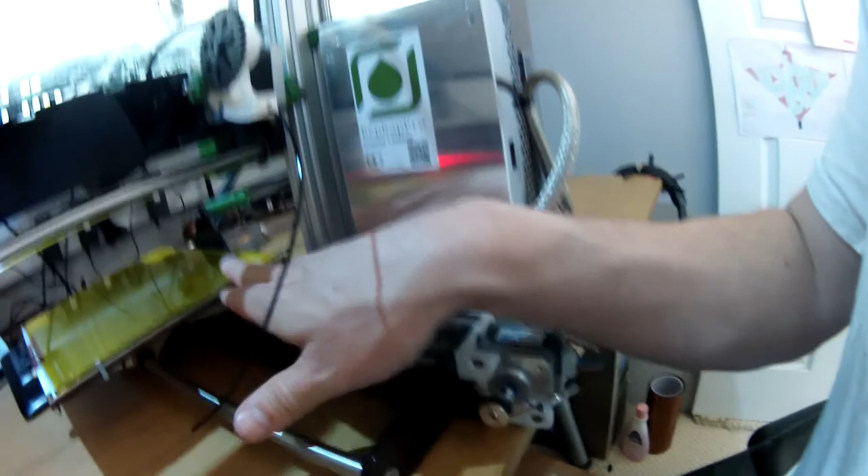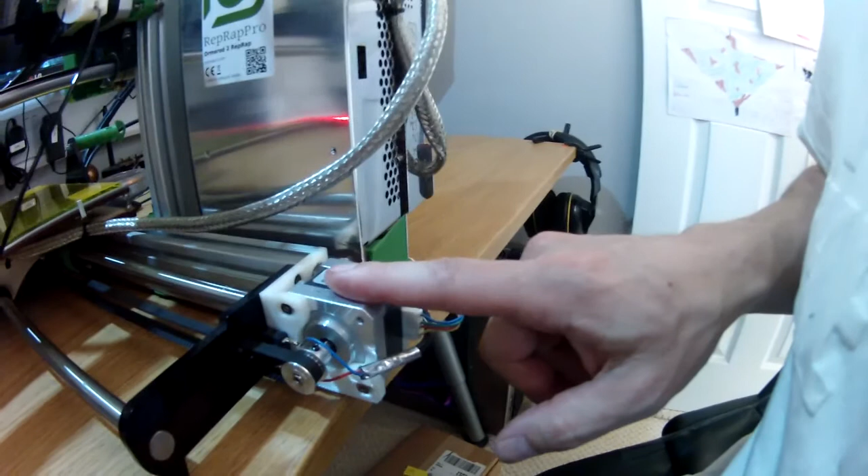So you can see here, if I push the bed over here, we've got some linear guide rails here just to kind of help control the movement. And then we've got a rubber drive belt coupled to a stepper motor here, and that controls the sliding of the bed in this axis, which is actually the y-axis.

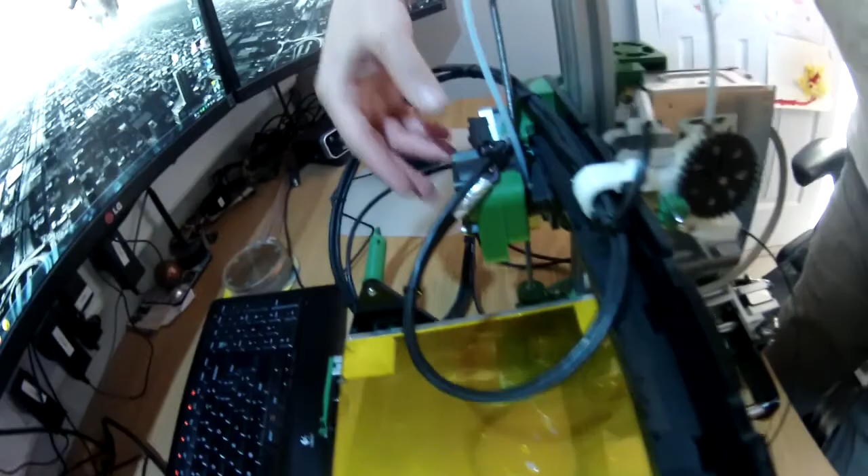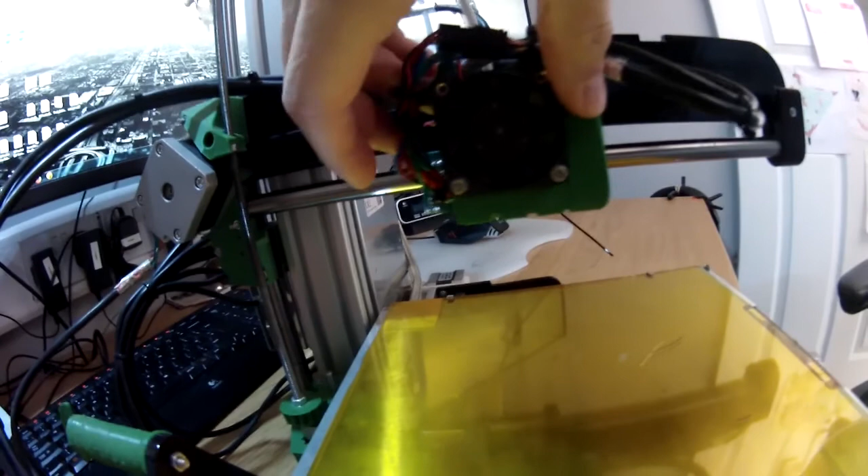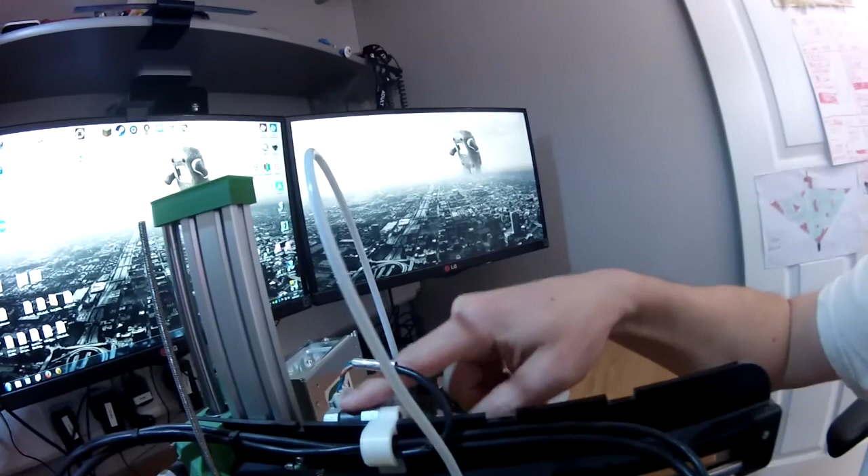Likewise then, if we come up to the top here, the print head, I'll move this printer around so we can see it a bit better. So here's the print head, and this is on the x-axis, so you can see there's another drive belt here, another motor here, controlling the axis moving in that direction. This stepper motor here, by the way, is operating the extruder. We'll come on to that in a second.

And down at the bottom here, there's another motor you can see tucked away here. That's twisting this threaded rod, which, if you just look carefully, you can see is adjusting the height of the head. So that's how we get our 3 axes of movement.

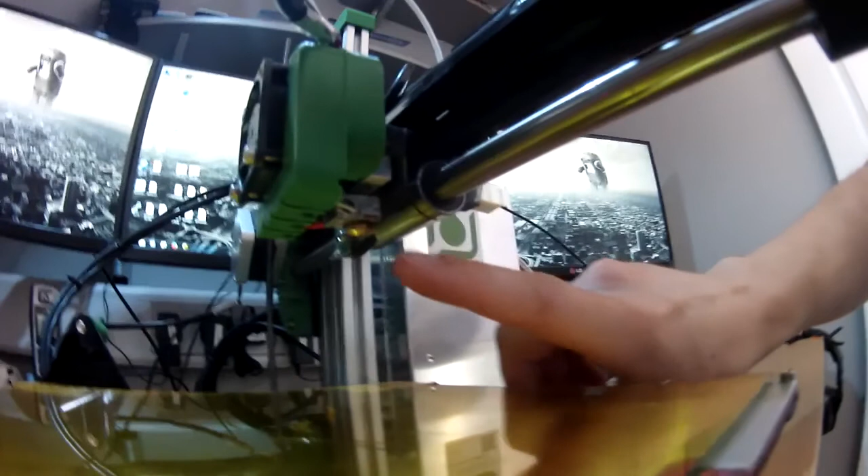We'll come on then to the print head itself. So the main components here, you'll see right at the tip here, there's a stainless kind of tip, and there's a very tiny hole in there, which is obviously where your material is extruded out of. This block of aluminium has got a heater in it. Gets very hot. So this is what's affectionately known as your hot end.

There's a temperature sensor in there to control the temperature, so it monitors itself, understands what temperature it's at, heats as it's needed. The fan is really there to obviously regulate the temperature of that print head, but it also blows air out across the model and cools that plastic as it comes out, so it kind of cools the material.

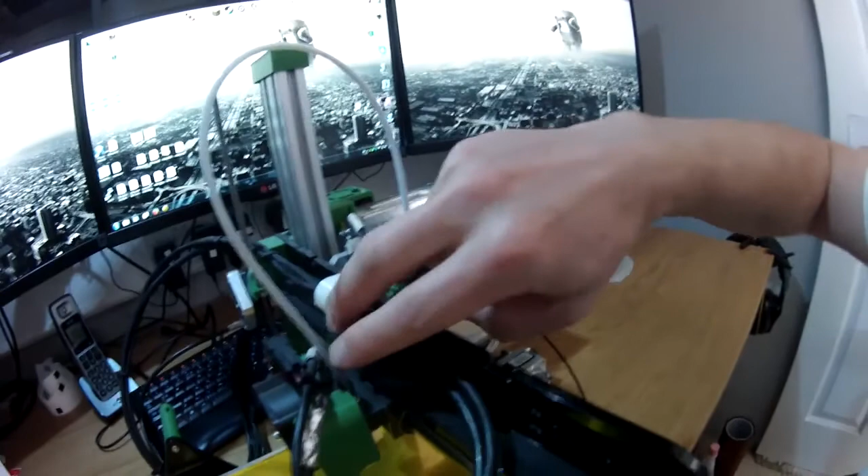You can see here there's a thing called a Bowden tube, which is basically the guide tube for your filament. So I've cut some filament off here, but you can see it kind of goes into the machine here. This motor drives a hobbed insert, so like a little insert with ridges in it, that grabs that plastic and pushes it down the Bowden tube and into the hot end.

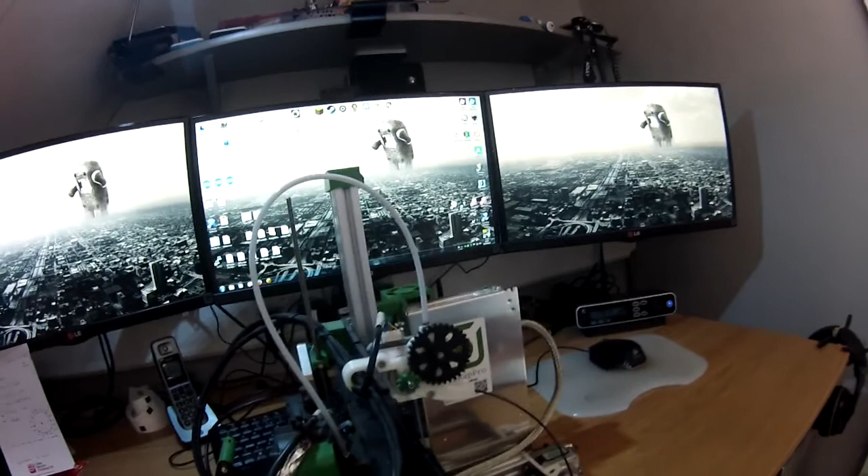And it's that pushing it into the hot end, coupled with the 200 degrees centigrade, which melts the plastic and forces it out of the tip here to create the model. And it's all very specific about the speed that this pushes through, the diameter of the material, the diameter of the head, to get an accurate print. Otherwise there's not really a lot more to this.

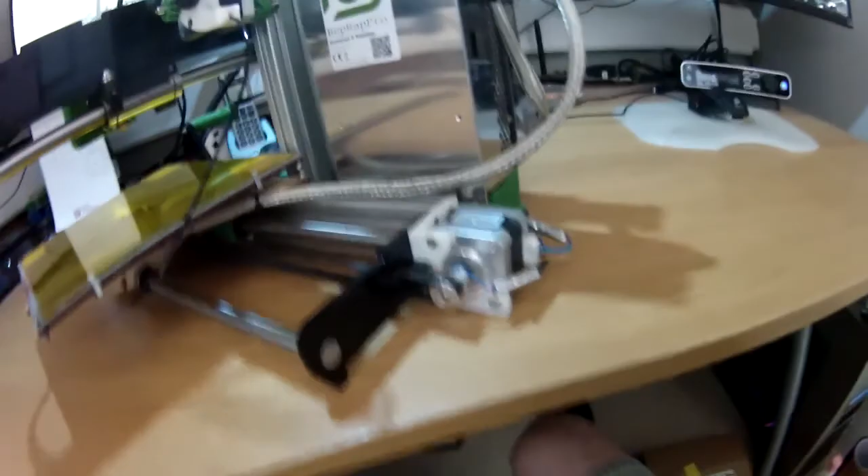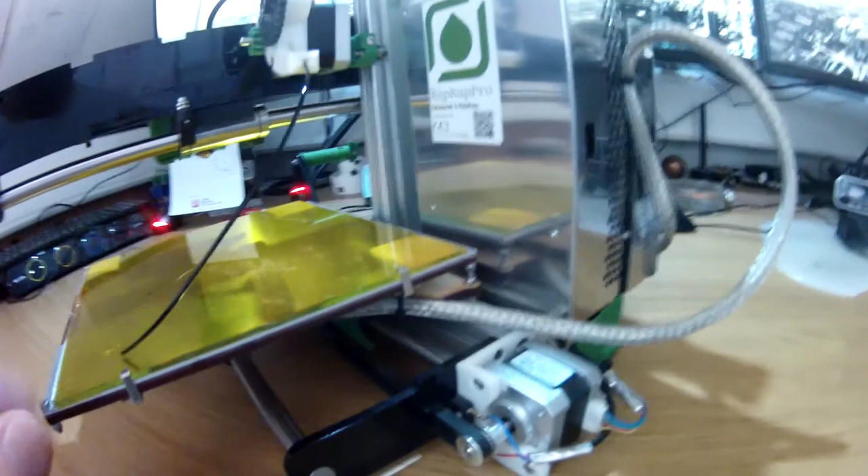There's one limit switch just down here you can see. If I move this, you might just be able to hear the click. So you can just about hear that click, I think. And that just allows the machine to understand when this y-axis has reached its limit. And it uses that to do a thing called homing, which we'll come on to later.

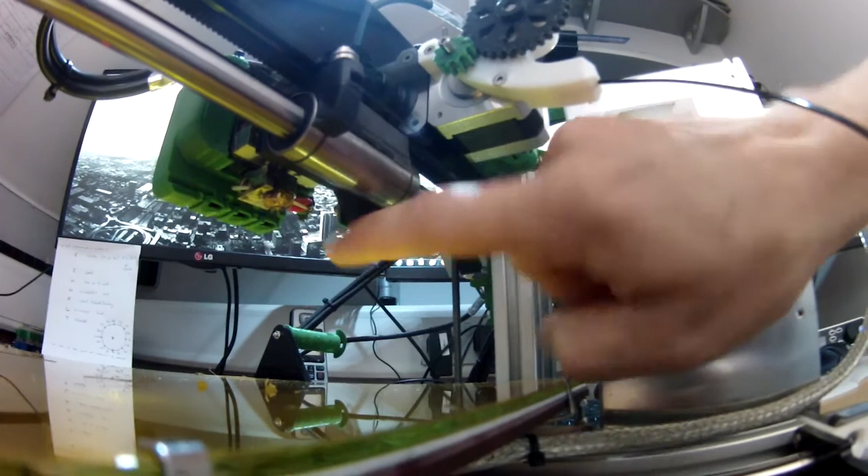There's also, under here, another sensor on the carrier for the print head. This is a distance sensor, so it's detecting the distance down here. And it uses that to home the z-axis. And it also uses it to home the x-axis as well. What it does is it kind of scans across the edge here, and when it drops off the edge of the print bed, it knows it's at that edge.

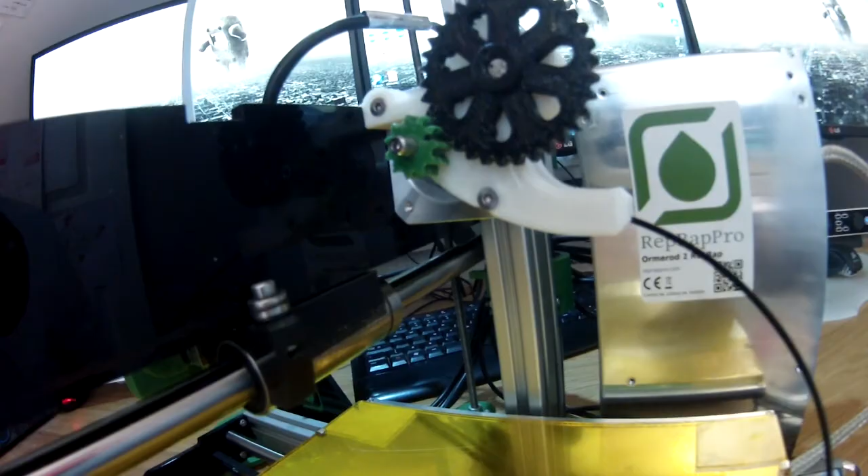Finally then, obviously we've got the electronic part. So this is just a power supply, this kind of metal enclosure here.

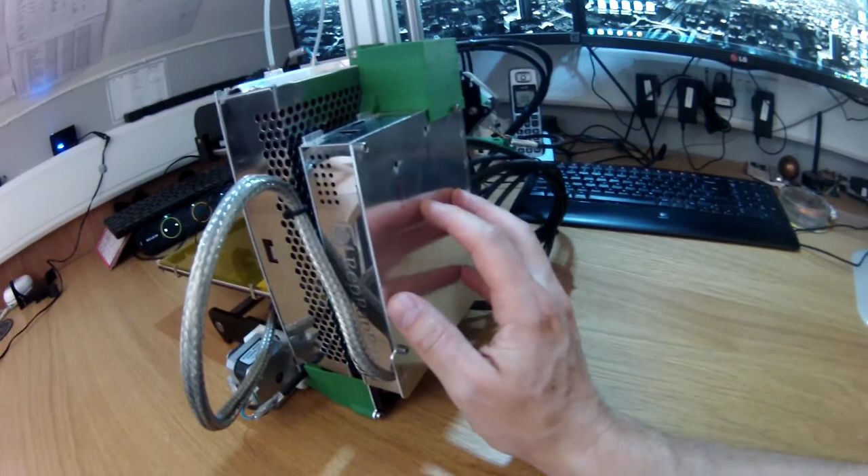So that's just a regulated power supply. And then we've got all the electronics in this little part here. It's basically an Arduino style board. But it's got some interfaces here, so you've got a USB port if you want to wire this into your computer directly. There is a network port, which I prefer to use.

So the Ormerod 2 introduced a network interface. So you can connect to this via a web browser and you can kick off all of your jobs that way. You also see there's a micro SD card here. That just stores configuration settings and all of your 3D instructions, so your print files basically. We'll come on to that. A cooling fan there, and that's about it really. There's not a lot to it other than that.

You'll notice something I should just point out. This has just got a single print head on it, but you can get machines with 2 or even 3 hot ends on them, so 3 complete extruders, so that you can load them up with multiple materials, different colours for example, and then you can print without having to change and reload material. Nice if you want to do multicolour printing. They basically just duplicate how many print heads they have on them.

The other thing that you can get is enclosed 3D printers. This one, as you can see, is out in the open. This would be very beneficial if you plan on printing in ABS. So maybe now is a good time to touch on the two main materials that these 3D printers work with.

So the most common one is a material called PLA, polylactic acid. It's what this is. It's what I do 99% of my printing in. It's cheap, cost effective. It melts at a lower temperature, so it's easier to print with, easier to get consistent results with, and it doesn't need heating up quite so much. It's not as strong though, so it depends what you're printing for. For most people, PLA is fine.

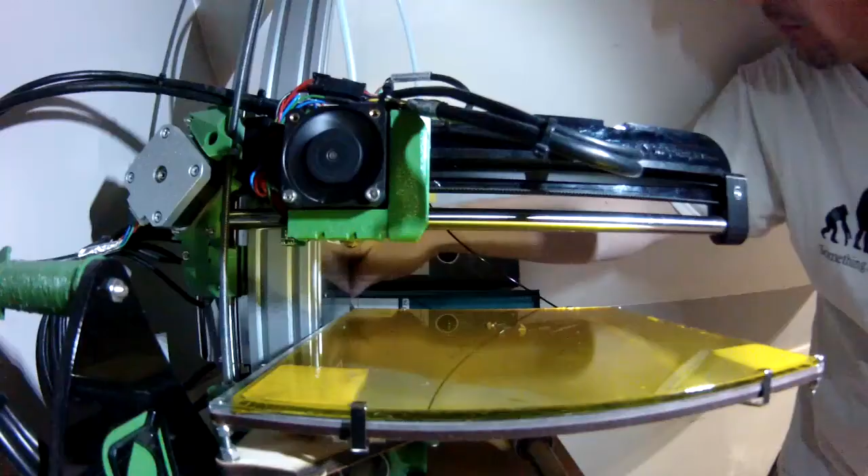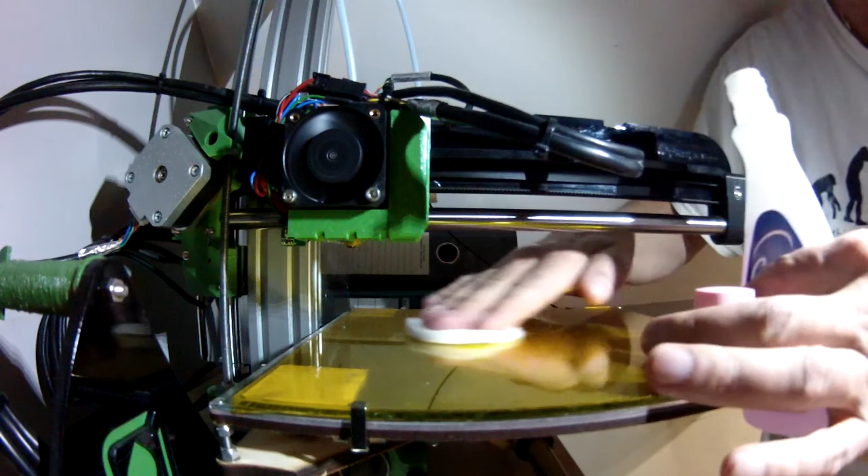First job on the printer here will be to clean the print bed. Make sure it's all nice and clean, not covered in any dust if it's not been used for a while, but also any grease or previous deposits of plastic. So best thing I found is a nice cheap and cheerful nail varnish remover. The key active ingredient in this is acetone. So just a bit of cotton wool, give the bed a good clean.

I'm using this one. I think I just got it from Boots, a popular high street chemist here in the UK. It's Q-Tex nail varnish remover. There you go. Smells quite nice, inoffensive.

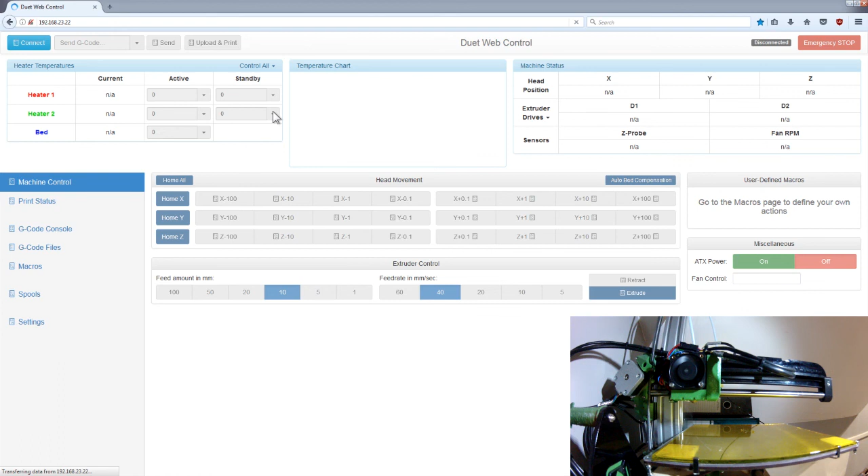Over to our web browser then, we're going to use this to connect to the web interface on the Ormerod 2. You can see it's all nicely presented in your browser, various controls here, but the key ones we're interested in are up here in the left. You can see heater and bed. And we're going to get the bed warming up.

We're going to just get the heater started on that, because it takes a good 10 minutes. So we'll get that going to 65 degrees. We'll get the head warming up as well. That warms up quicker, but the main one is to get the bed going. Yeah, that'll take about 10 minutes. So while that's going, we'll make a start with showing you how I use Simplify 3D, the software to do the creation of the G-code from the 3D model.

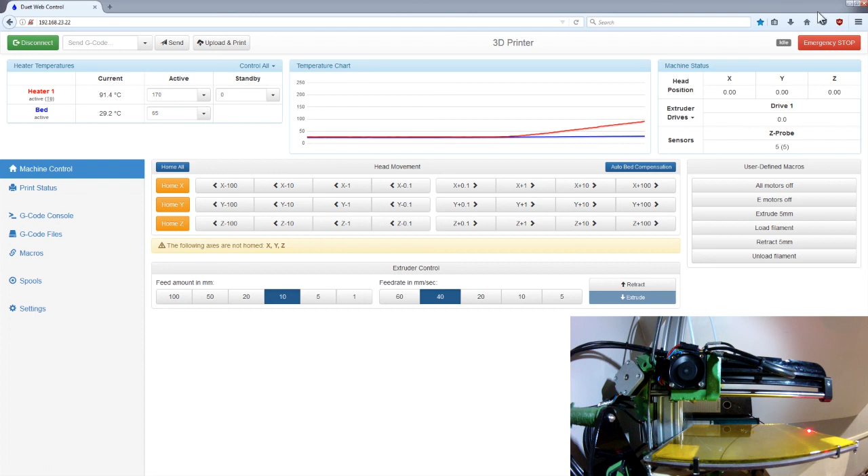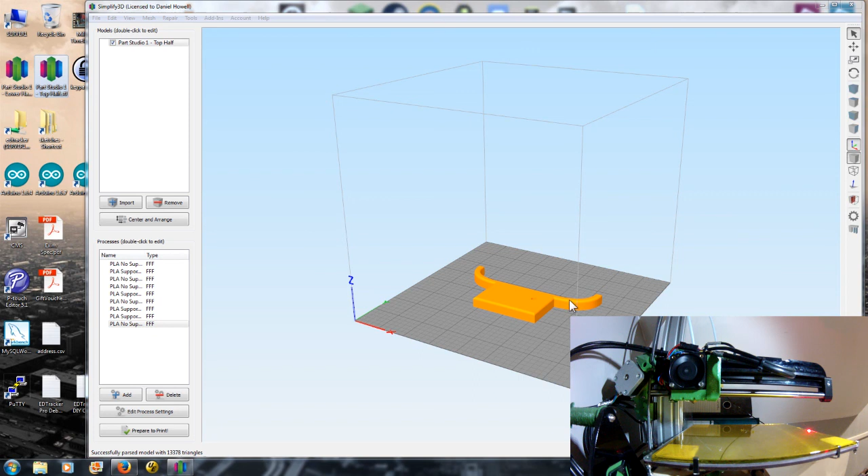Okay, so we'll launch Simplify 3D. Up it pops. You've got a visual representation of the print area, empty at the moment, but I've got the models, the STL files, on my desktop here. Just going to drag and drop that in, and there we've got our lid.

Now at the moment that's kind of upside down. I know it's the right way up, but as far as we want to print it, we want to print this upside down, because you see those cavities underneath are going to cause problems to try and print a suspended part like that.

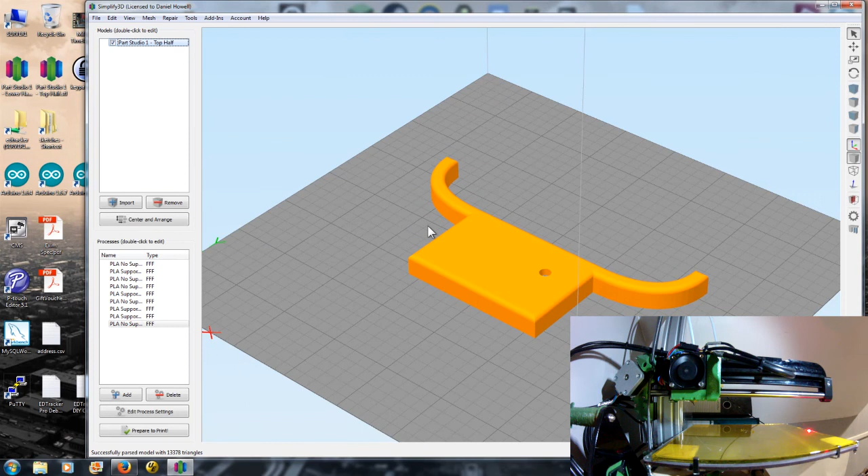So it'd print much nicer if we had it the other way around. So we can do this, place surface on bed, and we can click a surface, as you saw there, and just flip it over and put that down on the bed. So we'll print it that way up. That's much better, and we'll get a much better quality of print that way.

Now we're going to generate our G-code file for the printer. So we have various profiles. We click this and we choose one of these personal preferences. They're just profiles that I've set up for the type of material, whether it needs support or not, how much infill it needs, 15% in this case, which is just how it builds up the bulk of the empty space in the model.

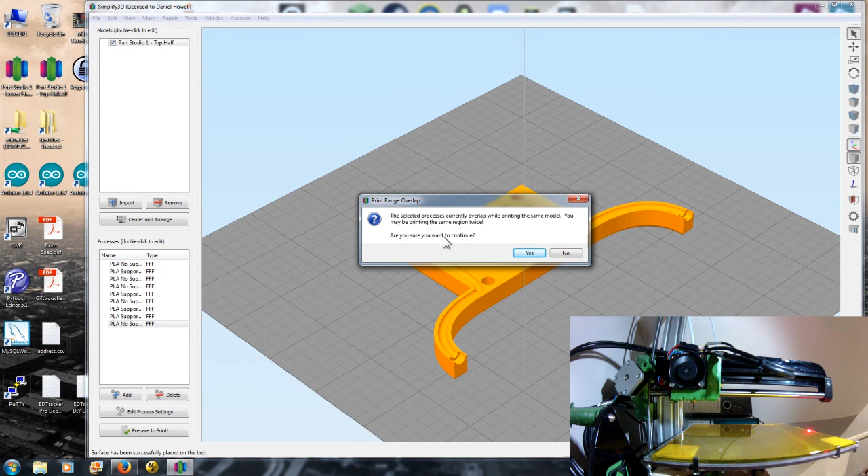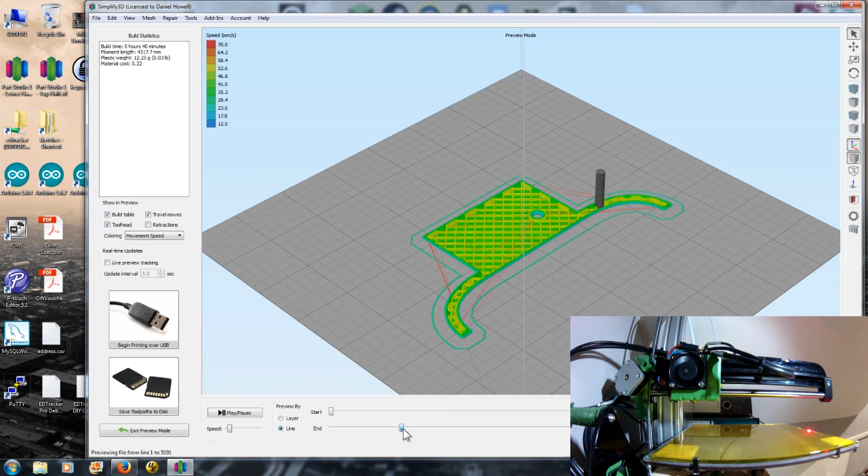I've just got too many profiles chosen. Hold on. None. That one. Go. There we go. So now we've got this nice little 3D representation. You can see I can drag this slider and step through the job. You've got this little visual representation of the job as it goes through. You can see it showing where the print head would move and building up the job. The colour represents the speed of the head at that point.

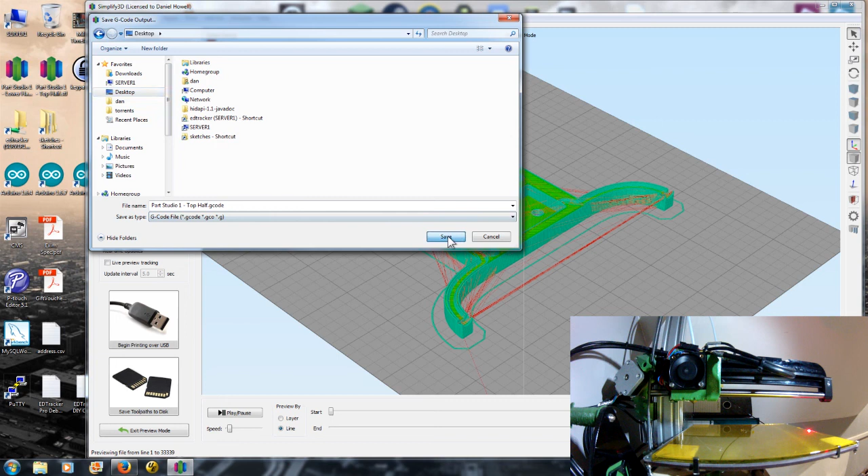When you're ready, we can click on this icon, the USB one, to print direct to the printer, but we're going to use this here to save it to a G-code file. I'm going to save that on the desktop. There's our G-code, and that's it for Simplify 3D. We see we've got the file here on the desktop. Let me just move that out of the way. There we go. It's generated a G-code file for us, and we're going to upload that to the printer.

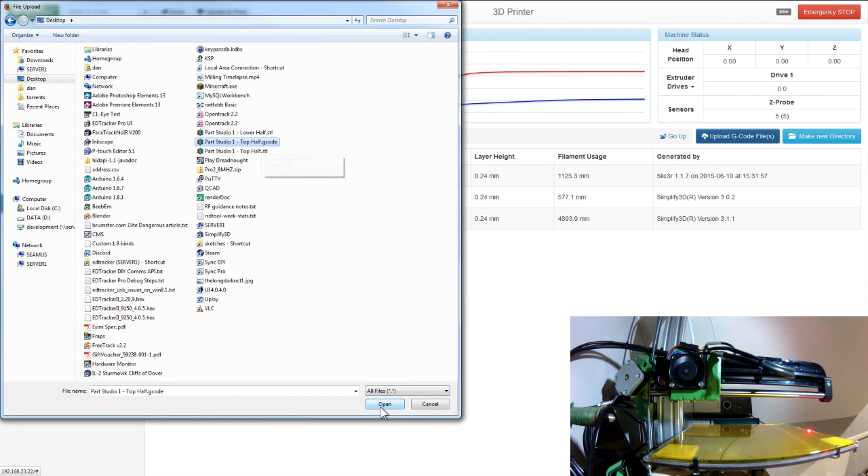So we go back to our web interface, go to our files. It's got a folder structure, so I've got an EDTracker one already. I'm just going to keep this organised, put it in there. Click upload, give it the file that you want. So we're desktop, Part Studio, that's it, G-code 1, top half. Click open, and that will upload it to the printer over the network. There it is, and it's now stored on the micro SD card in the printer.

Yeah, you can clean up all this. I'm going to get rid of this one, don't need that. Manage your files kind of thing. Yeah, and there it is. So one thing we need to do now is, you can see it's all warmed up. The head is nice and warm, the bed is getting there, it's almost 60 degrees now, it will be ready, but we've got to home it. So we're going to home the machine now.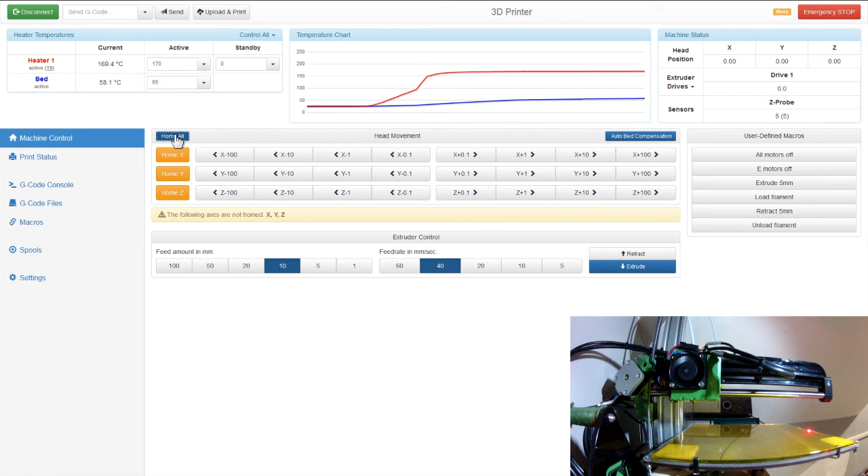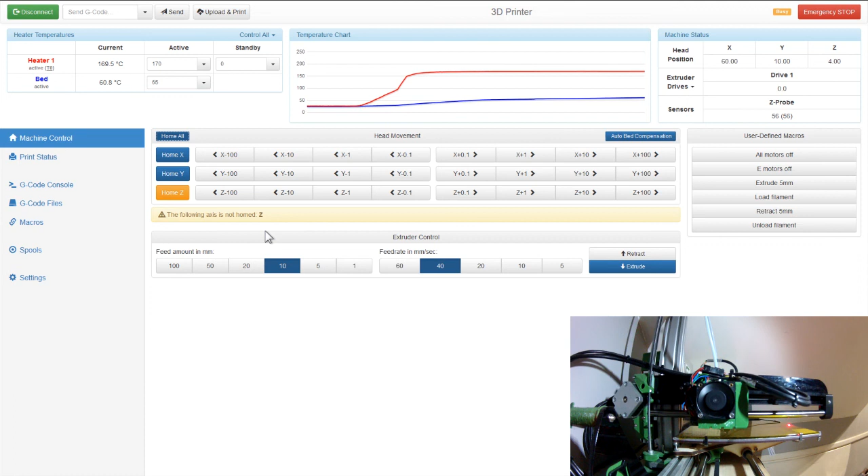So you can see, I click the home all button, and you can see in the bottom right there the printer's going through this process of establishing where each of the axes is. So it knows the bed is in a certain position now. Now what it's doing is it's bringing the head down and it's using that distance sensor to gauge when it's just about to touch the bed. Now I don't rely on this, you'll see in a second. I manually tweak it, but bang, there we go. It says it's happy now. It moves to the center of the bed, and then what I'm going to do is manually twiddle this and just get the clearance right.

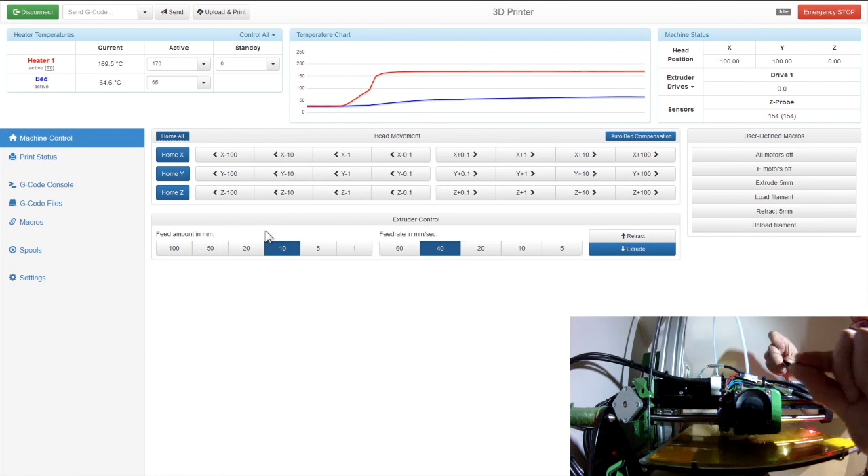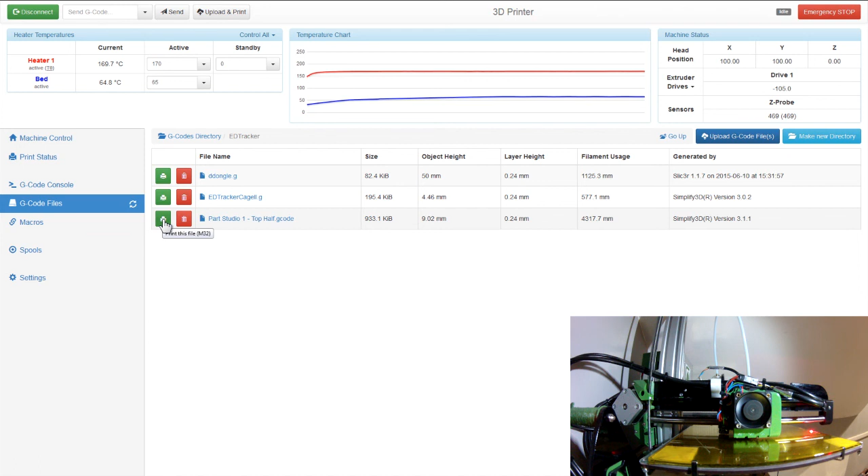Back to the desktop then. You can see we're all homed, we're all blue here. Temperatures are good, the bed's good, so we can go to our G-code file and you just click the little green print icon and we shall set the machine off. What I'm going to do then is leave that going on a bit of time lapse. I'm going to talk over some hints and tips that I've picked up over the years of ownership of this printer.

Quick thought on homing, in particular the Z-axis. What I have found is that there's lots of automated process built into this printer to get the Z-axis height right. I've got to the point where, to be honest, I just do it by eye, and I can reliably do it by eye now.

I can listen. As I bring the head down, as it starts touching the bed, the noise of the machine changes because there's some vibration. So I can hear that, back it off, and I've just got to the point now where I've done it so many times that I can kind of judge the Z height manually myself.

I just literally turn the threaded bar with the motors turned off, and I just kind of get it where I want it before I start the print job. You can see here, this is what I'm doing, I'm just getting that height right before I start the job.

Accuracy: you probably get kind of 1/4 mil accuracy out of a 3D printer, I would guess. It's going to vary a lot on how much time you spend leveling the bed, which is another thing. Do spend some time getting the bed level. This has a kind of 3-point adjustment, like a triangle, which means you can adjust this. You should be able to get this perfectly flat, no problem.

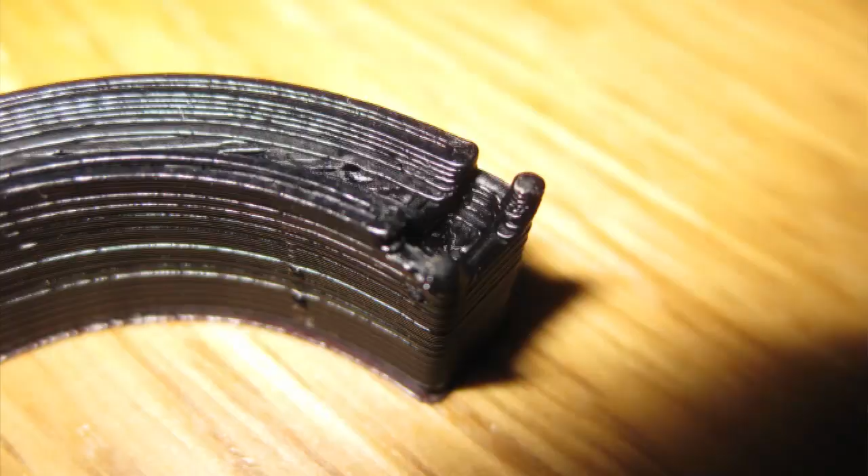I'm going to do that with some pliers, maybe. Just snap it very gently. I don't want to snap the tail of this device. Hold on. There we go. Okay, there it is. So that's our idea. LED points in there, there and there. We need to test whether we've got a good hole through that. Let me get some wire. So here's the moment of truth. Is that hole all the way up there? Yes it is. Yeah, there we go. I've got to just get some tweezers just to pull the wire through there. But that's good. We've got wire. Wires will fit round there fine.

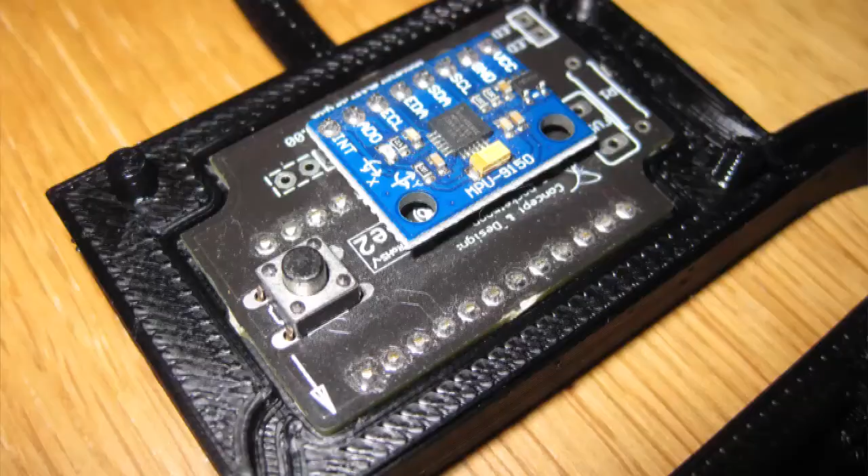Let's get the PCB. Let's try that. So here's our PCB. We'll just check that that fits in. Oh, perfect. Slots straight in there. Straight in. I can't believe that. And get to the USB connector there, and the lid goes on. That is very rare, to be honest, that the first print actually works. I'm quite impressed there. I could probably make the PCB slightly tighter, to be honest. It's clattering around in there a little bit, but I prefer that. I can put a little bit of hot glue in there. But yeah. Right, let's park that.

Next video then we'll assemble all of this, we'll do all the soldering, and we'll do the final testing, see how it works. Okay, so that for this episode is it. 3D printing done.